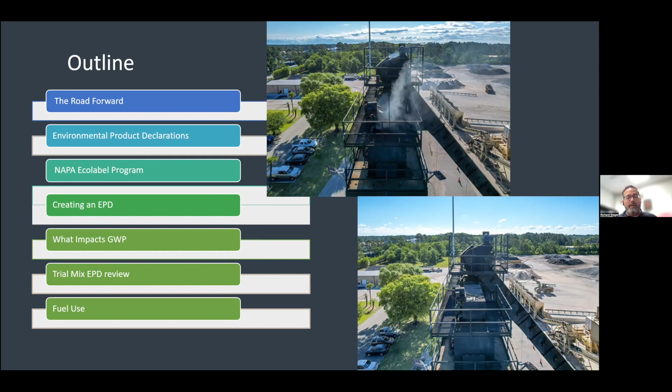Many of you have probably heard about the Road Forward from NAPA, which is NAPA's vision for net zero carbon emissions for the asphalt industry. Many agencies and governmental bodies are considering greenhouse gas emissions in their project funding and procurement decisions, and so the asphalt industry is leading the way in this area. NAPA has developed a set of long-term goals and tactics for achieving net zero emissions by 2050. This plan was put together by a 21-member task force who met throughout 2021.

This is the genesis, or this presentation today is really kind of what got us into looking at the fuel use. One of the benefits of running warm mix is obviously dropping the temperatures and using less fuel. Most of that shows up in an EPD. This is the framework that is used to quantify greenhouse gas emissions, and EPDs are part of that.

And the Emerald Eco Label tool is a part of this framework. You'll notice that the EPDs that we're talking about today are considered cradle to gate, which means that they include the materials, the transport, and the production. This production phase is where the benefits of warm mix come into play.

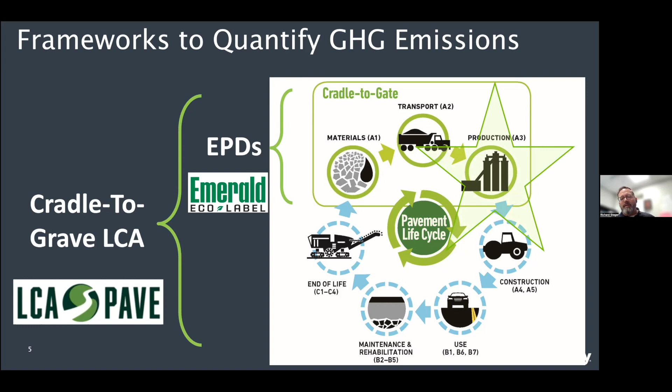So to understand what carbon emissions are, it's helpful to understand what kind of carbon we're talking about. This graphic gives you an idea of which CO2 emissions we're discussing here today. Essentially, we're looking at embodied carbons. Let me get my pointer up here.

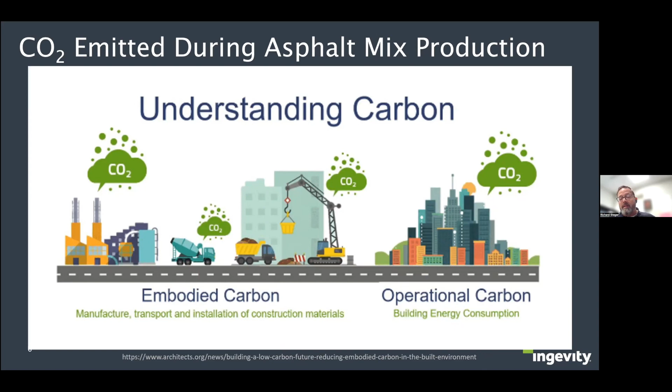This is the type of carbon we're talking about as embodied. It comes from the manufacture, transport, and installation of materials like asphalt mix. It differs from operational carbon, which is typically generated from buildings and living in the built environment. You may wonder, what is the built environment?

Well, this gives you an illustration of what the built environment is. The built environment produces about 40% of the greenhouse gas emissions. This kind of gives you an idea of how these emissions are divided.

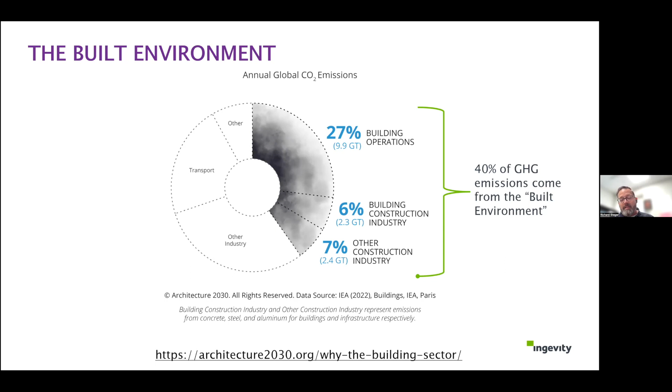When you look at an EPD, and if you're not aware, this is what an EPD is, Environmental Product Declaration. It's essentially a nutrition label for various products. The NAPA Eco Label tool generates EPDs for asphalt mixtures, and the EPD document is an 11-page report that's generated by this program.

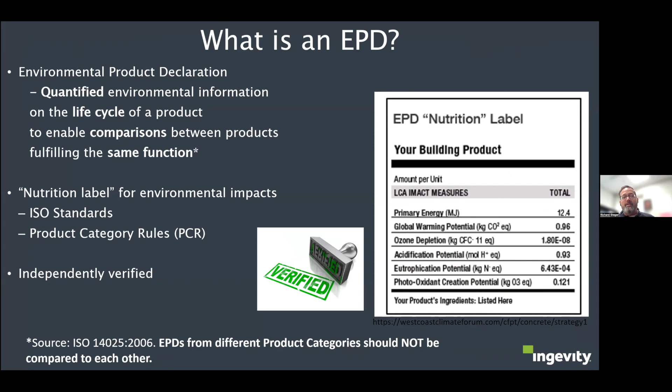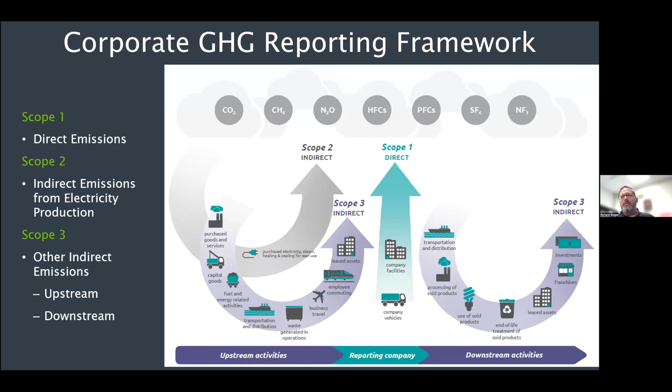So EPDs are part of the corporate greenhouse gas reporting framework, and as you'll see here, they're part of the scope 3, or indirect, type of emissions. There are indirect emissions that are upstream and also downstream of what is considered scope 1 direct emissions.

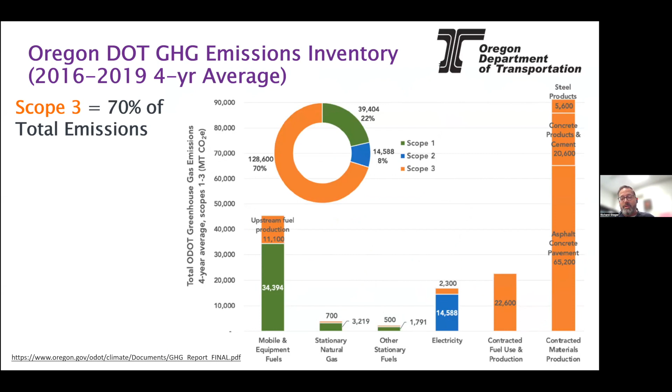To give you an idea of how asphalt mix and mix production impacts scope 3 emissions, this illustration will help. The Oregon Department of Transportation generated their greenhouse gas emissions inventory for 2016 to 2019 and reported that 70% of all the emissions were scope 3.

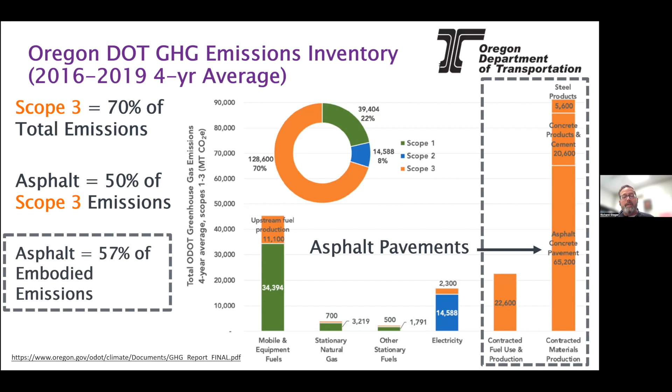Of the scope 3 emissions, 50% can be attributed to the asphalt. This works out to about 57% of the embodied carbon emissions being related to asphalt and asphalt mix production. Using warm mix can help in reducing your emissions. But the question is by how much?

All this means is that our industry needs leaders like Duval Asphalt, who are willing to produce mixtures and decrease their greenhouse gas emissions through the use of warm mix technology and lower production temperatures.

So now we're going to talk a little bit more about EPDs. These are some of the key components of NAPA's EPD program. You'll see here, these are the general program instructions. There's an underlying life cycle assessment that was done for the program. There's product category rules, and then finally you have the EPD software.

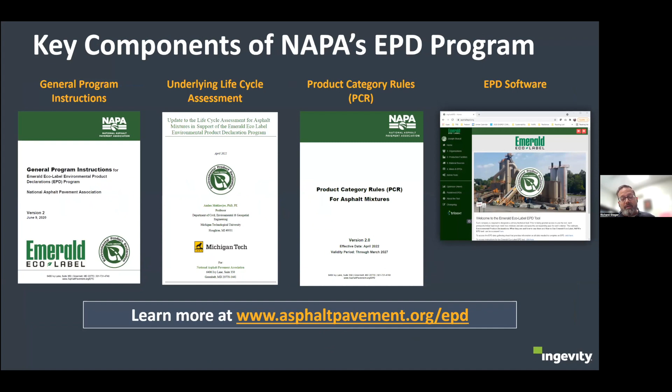You can access all of this by going to asphaltpavement.org/epd. I'm sorry, well actually, that's where this program is, asphaltepd.org.

So a little bit more about the Eco Label program. One of the things to keep in mind is that it generates EPDs that are plant specific and mix specific. That's a little different than some of the other types of products out there, such as concrete, where they have industry averages. The nice thing about the Emerald Eco Label tool is that it's very specific to the plant where the material is produced, and it's very specific to the mix.

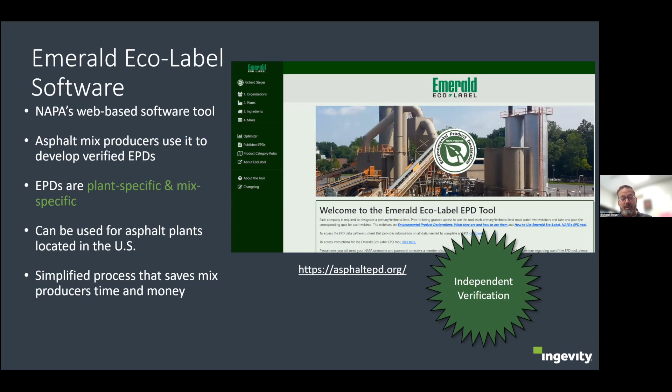So how do you use the Emerald Eco Label tool? You go to asphaltepd.org and you register. There's a couple of webinars you have to watch and then pass a couple of quizzes. Once you do that, then you can gain access to this tool.

One of the tools that was developed was this spreadsheet that NAPA has out there that helps you gather all the data that you need before you start actually inputting any of the information. You have to go through the process of purchasing access for your plants. You enter this data in for your various plants and then upload some supporting documentation.

What sort of data is required? Well, typically you're going to need 12 months worth of fuel use data, and they want that to be within the last 5 years, for whatever type of fuel you're using at your plant. It's going to include your burner, the hot oil heater, if you've got a generator of any type, and any sort of equipment at the facility, such as loaders, skid steers, those types of things.

You'll need to know about the electricity consumption, any sort of water consumption, and then finally you'll need to know about the total mixed tons that are sold. One thing that NAPA points out here is that because this data is confidential, you really can't see what is actually input. It doesn't show up on the EPD. We'll take a look at that a little bit later.

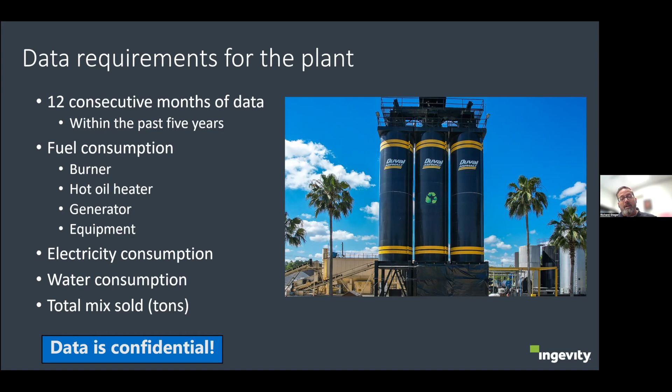For the mix design, you need to have all of the various materials identified: all the different aggregates, the asphalt binder, how much RAP or RAS you're using, or any of the additives. And then finally, you'll need to know how far you're transporting all of these materials and what type of transport—truck, rail, or barge—and the mix production temperature.

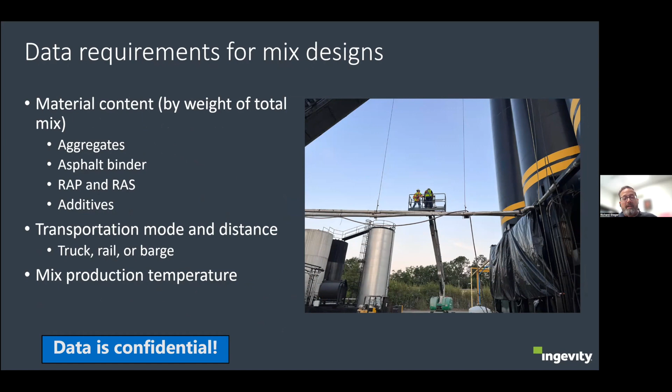To give you an idea of what an EPD does, or what the global warming potential is from a typical plant on a typical mix: say you have 95% rock, 5% asphalt binder, you're transporting these materials about 22 miles, using natural gas, and burning about 289,000 BTUs per ton of mix.

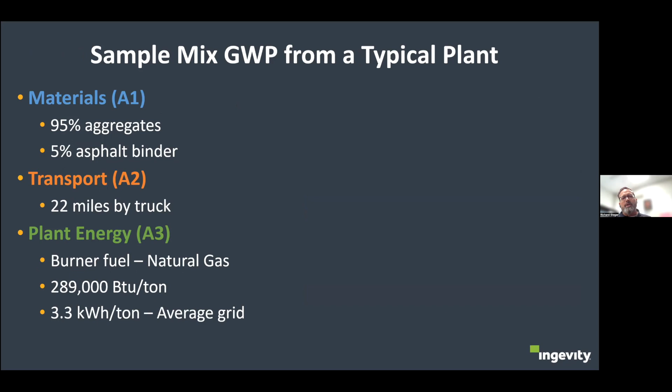And you're using about 3.3 kilowatt-hours per ton of mix on your electricity side. This is what the total global warming potential would be for the mix. You'll notice that it's divided into the A1, A2, and A3 portions for the materials, transportation, and operation. You'll see that most of this, in this particular example, comes from the material side. This can be very different depending on where you are in the country and what your particular situation is at your plant.

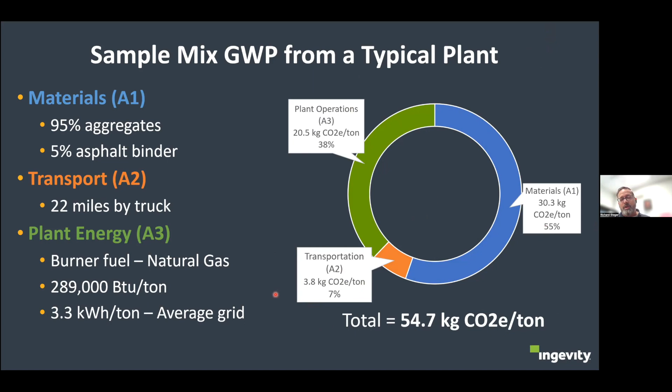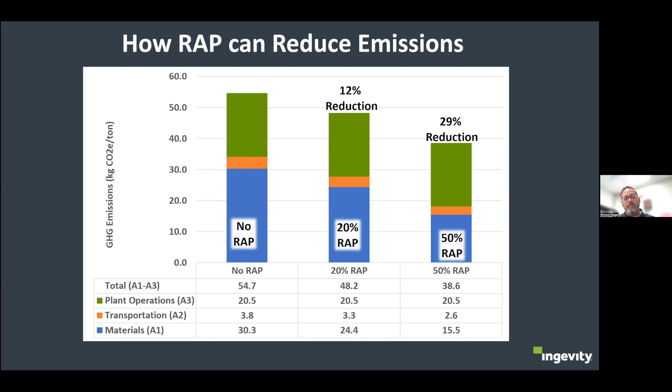One question we get a lot, and I'm sure NAPA has seen this too, is that RAP can help reduce your emissions. As you begin to increase the amount of RAP, your global warming potential numbers start to decrease. Another benefit: as you drop temperatures when using warm mix, you can also see a decrease in your global warming potential. It's a little more difficult to do that right now with the way the Ecolabel tool is set up, and we'll talk more about that in a minute.

So what are some common questions about EPDs? What are the biggest contributors to greenhouse gas emissions? As we alluded to earlier, aggregate hauling really has a lot to do with that. If you're hauling by barge and your aggregates are coming from a long distance, that can have a big impact on your global warming potential. Hauling it a long way by truck can also have an impact.

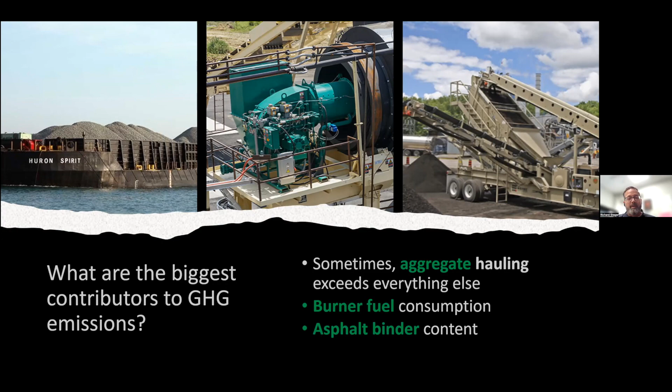The type of burner fuel you use, as well as how much you're using, can impact your global warming potential. And also how much asphalt binder you're using in the mix will definitely have an impact on what the GWP is.

Another question is: will these types of mixtures have an impact on quality and durability? One thing to keep in mind is that these specifications, and these environmental requirements, are not going to go away. But the good news is that the balanced mix design process can help in this process.

Recently NCAT published a case study using warm mix that had a bit of RAP in it as well, published recently on the NAPA website. It's called 'Improving Cracking Resistance in Alabama.' If you get this presentation after the fact, there's a link that will take you to that. If you go to the Balanced Mix Design resource page on the NAPA website, you can download a copy of this report.

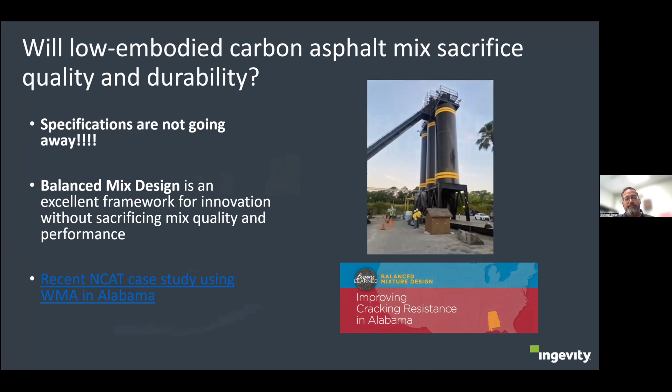So does the EPD give credit for warm mix? Not yet, that's a complicated question at this point. Part of it has to do with the way they're accounting for fuel use. Right now, the way the product categories are set up, you don't actually get that reduction unless you have 12 months worth of fuel use data that you can input into the program at those lower production temperatures. Then you can get credit for it. And right now, there's not a lot of people in the US that have that much data at lower production temperatures.

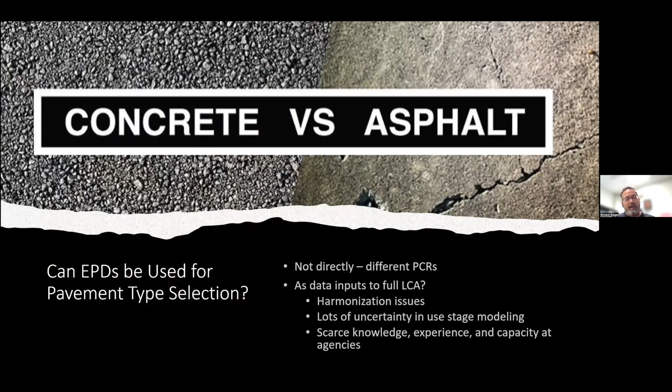So can EPDs be used for pavement type selection? The main question there is, can we compare concrete versus asphalt? Well, the short answer is no. You can't compare these two materials, and you can't compare their EPDs. The main reason is their product category rules are different, so all of the upstream data is different for concrete versus asphalt materials. There are harmonization efforts underway—you've probably heard of some of the stuff going on with the EPA—and there's a lot of effort that's going to come out over the next year or two where they're going to try to make some sort of harmonization between these types of materials, looking to have agnostic product category rules for these different materials.

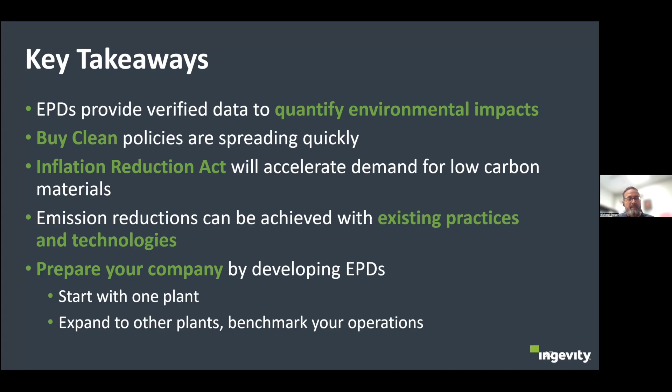So some key takeaways here: EPDs provide verified data for quantifying environmental impacts, and these buy clean policies are coming around the country very rapidly. The Inflation Reduction Act is going to increase the demand for these low carbon materials, and there's different existing practices and technologies that will help you reduce your emissions, with one of those being using warm mix technologies such as Evotherm. You can help create EPDs for your company—you can start with one plant, and then expand to EPD production for various plants. I've done these for one of the contractors in the state of Oklahoma, and essentially, once you've got all the data gathered, it takes about an hour or two to generate all of these EPDs.

So let's jump into the mix, the EPD for the mix that was used for this particular trial. You can see this is the cover sheet on this report. Molly put this together for Duval, and you can see the mix name is in here. The entity for which the material is produced is Florida DOT. The specification is an SP 9.5, a dense superpave, 9.5 millimeter, using a 52-28. One thing I'll note here is that on this particular EPD, it says it was produced between 300 and 320 degrees Fahrenheit. In actuality, when we ran this trial, we ran at 325, 275, 265, and 250. So keep that in mind as we go through this.

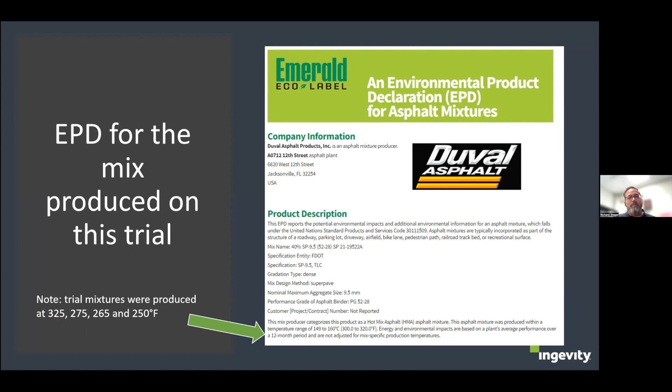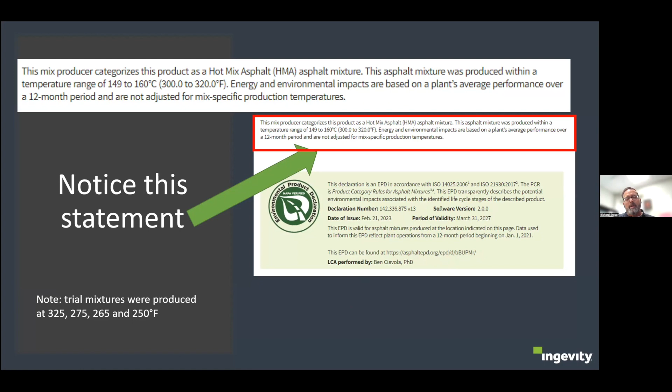This notice statement is on every one of these EPDs. It tells you the EPD declaration number, the software used to produce it, the date it was issued, those types of things. You also notice there's a URL, and this is a permanent URL for this EPD—if you go to this URL, you will find this EPD, and it will be out there in perpetuity. Again, this particular mix was not actually produced at those particular temperatures, and this is the notice that shows up on this statement.

This is the detail that the EPD gives for the different types of material. Really all you know is that it tells you it's natural stone. There was RAP used in this mix, and we'll point out here that we used percent by weight—it had almost 40% RAP in this particular mix. The binder was around 4%, and the rest of the material was natural stone.

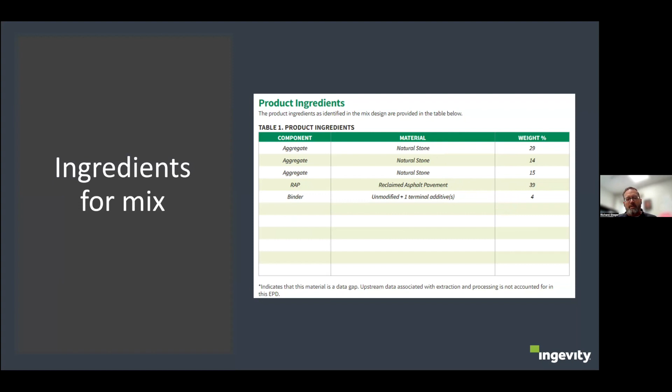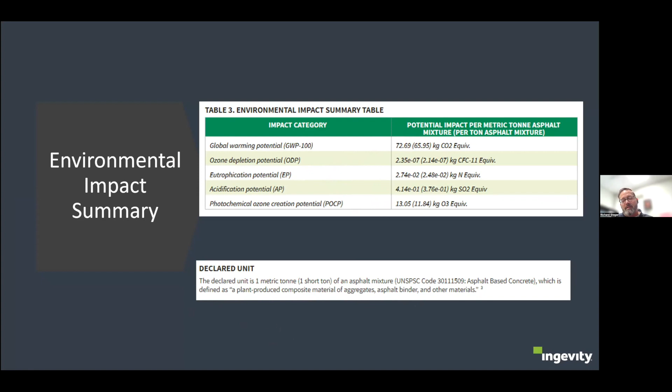This is the environmental impact summary table listed in the EPD, and it gives you the information on the global warming potential. For this particular mix, it was around 72.7 kilograms of CO2 equivalent per ton of asphalt mixture. This number is related to a metric ton; the number in parentheses is related to a short ton. It also gives you the ozone depletion potential, eutrophication, acidification, and photochemical ozone creation potential for each of these mixes. The declared unit on an EPD is 1 metric ton or 1 short ton of asphalt mixture—that's important to know as we move forward, and important to remember.

One of the things that's very useful in the Eco Label program is a tool called the optimizer. One of the things you can do in this optimizer is generate diagrams called Sankey diagrams, and you can look at different variations of what happens with a particular mix.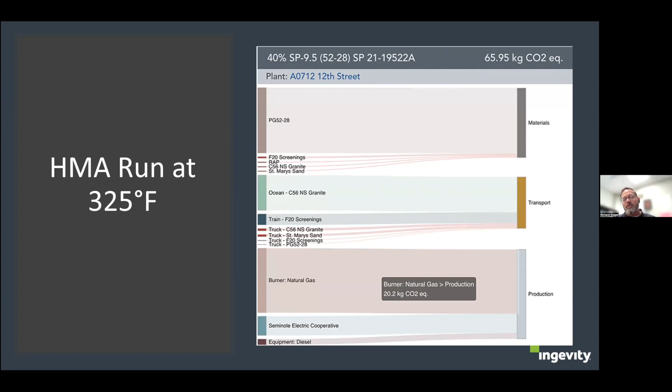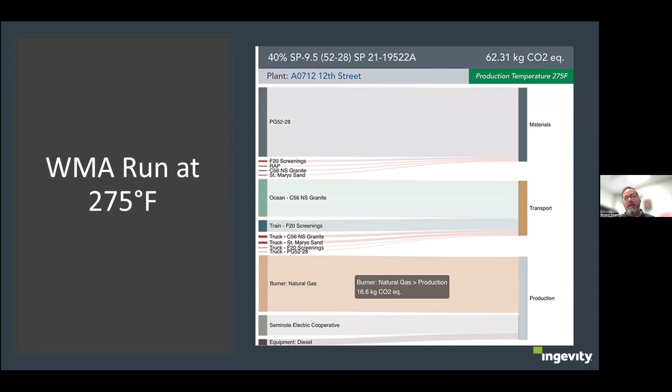As we begin to drop the temperature down to 275, we went into the program and adjusted the fuel use. Here, the burner was around 20.2 kilograms, and this is the amount of CO2 related to burning that much fuel for this mix. When you drop the temperature, you use less fuel, shown here at about 16.6 kilograms of CO2 at 275. When you drop to 265, it's around 15.9 kilograms, and at 250, it's around 14.9 kilograms.

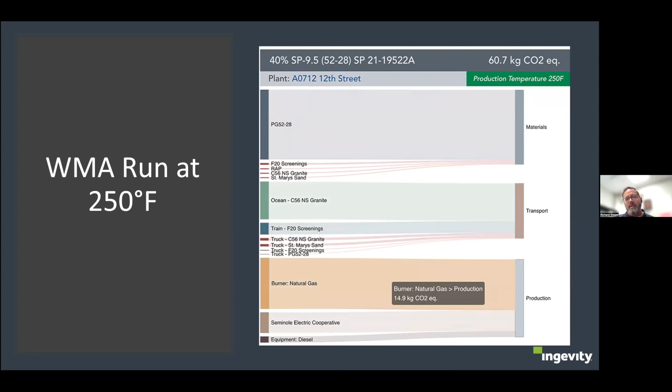To summarize, as you begin to drop the temperatures on this particular mix, the global warming potential number begins to drop. Also, you'll see that the contribution from the natural gas to the global warming potential, when you burn it, begins to drop here as well.

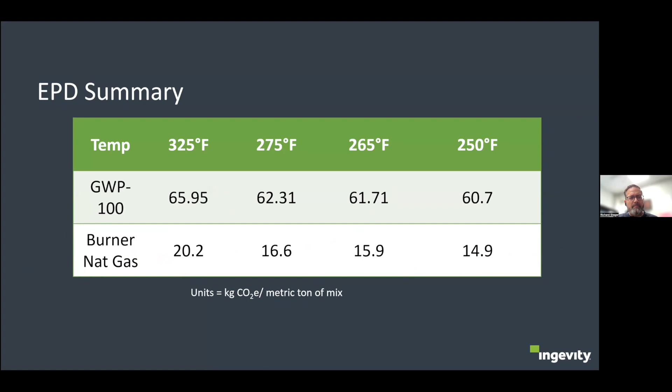My colleagues at Ingevity spent a lot of time collecting this data, and my colleague Trey Wersh put this slide together. We used a natural gas price of $9 per MMBTU for this scenario. At this plant, we were running about 200 tons per hour, with 40% RAP, and assumed they run about 150,000 tons of mix per year. If we ran it at these lower temperatures every year, they could save about $60,000 a year just by running the mix at 265 degrees Fahrenheit, or about 41 cents a ton.

So that's one way that warm mix can help reduce your costs when it comes to fuel costs essentially. This is one of the benefits from using warm mix technology, and it also helps out from an environmental standpoint.

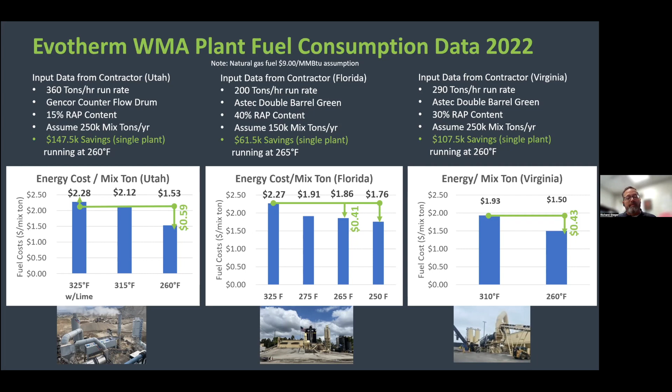This is another chart we've developed based off a lot of the work we've done here. It shows essentially that as you begin to drop the temperature, you begin to save money through the production of using less burner fuel.

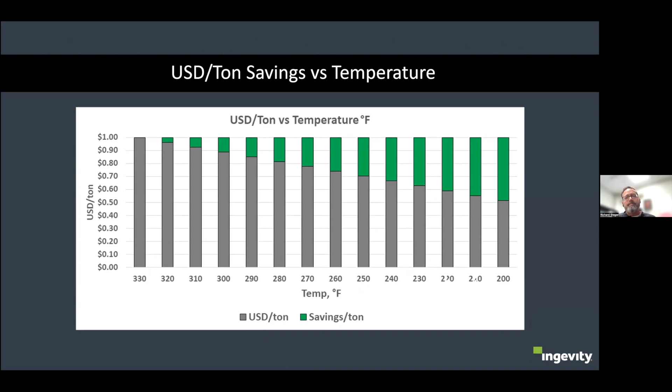Thanks. As Molly mentioned at the start, a lot of studies have been done on the effects of the binder, mix performance, and pavement design with warm mix. We kind of looked at it here at Duval Asphalt, where we use the Ingevity product Evotherm day in and day out, and we use high RAP 40% day in and day out. So let's lower these temperatures and see what we can find out, and see if this is really going to be realized, primarily in the fuel savings as well as the performance in the field of the mix.

And along the way, we gathered some pretty interesting data. Overviewing, we did initial stack testing to get a baseline of your carbon monoxide, nitrogen oxide, volatile organic compounds, and carbon dioxide. Concentration was on the CO2 because I was told it's the bulk of the pollutants, the largest piece of the pie against the COs, the NOx, and the VOCs.

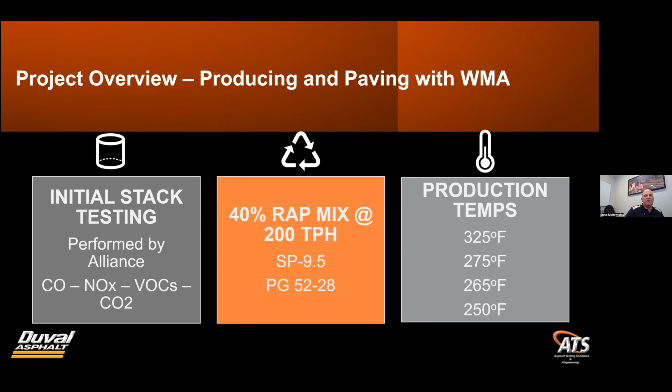We produced this mix over 3 consecutive days because we wanted to run at each temperature a minimum of 1 hour steady. It's a 40% RAP mix, 200 tons per hour, an SP-9.5, as Richard had mentioned, utilizing PG 52-28, and there again, the 4 temperatures.

The 3 main focuses, again, are the green initiatives, the visible emissions tracking at the plant and also at the paver, and the financial savings relative to temperature reduction. So if we lower these temperatures, how much are we really going to realize in savings, especially in fuel? And then also field effects, like I mentioned, impact on compaction efforts and workability.

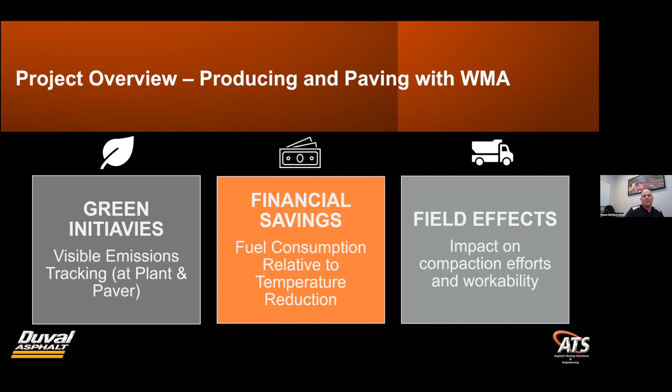Richard had mentioned some of this. According to the greenhouse gas emissions inventory for asphalt mix production in the United States, current industry practices and opportunities to reduce future emissions. One way to reduce these emissions at the plant is to implement or increase the use of warm mix technologies.

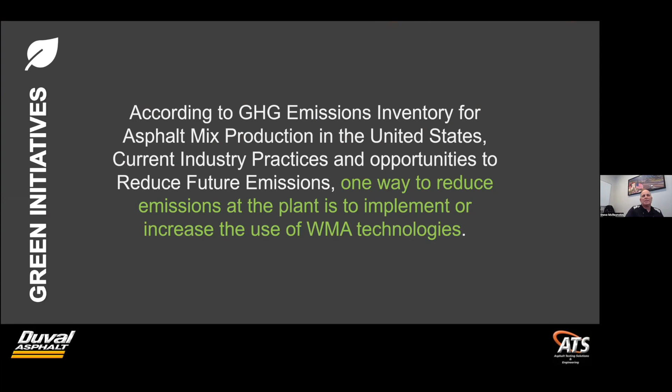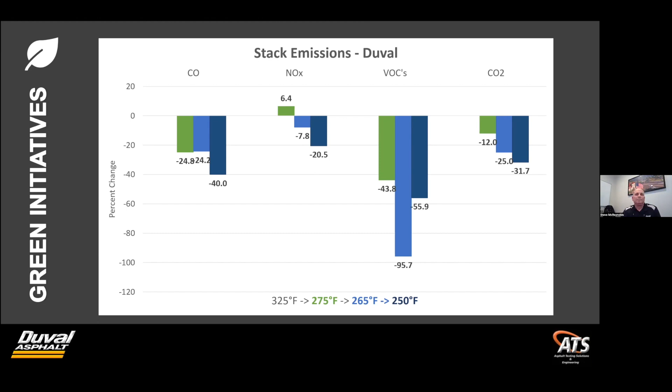Also, we looked at fine particles and very fine particles. Mostly with the fine particles are the stuff that you can see, like smoke, sand, carpet fibers, those things you can see, versus the very fine particles.

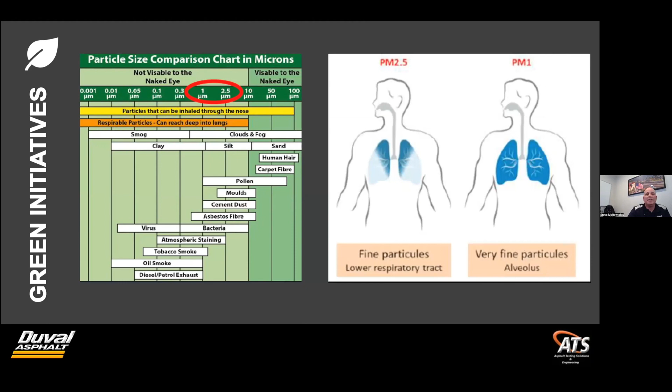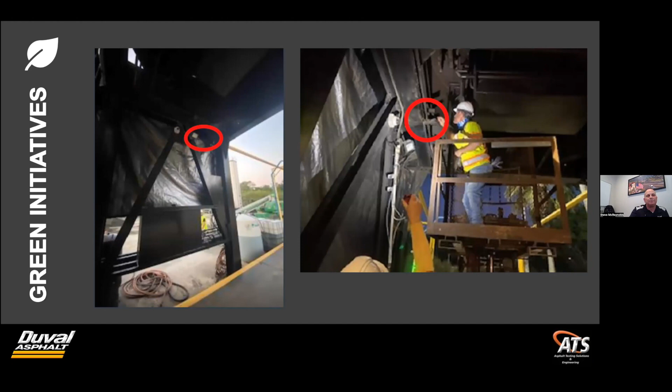So in order to do this, they put particulate emission devices. They installed them at the plant, put them underneath the silos. We utilized 2 silos, I think, for this. We did drape the silos with tarps on the outside to keep the wind away, because we were, I think, in late spring, early summer. So we do have some wind. We're relatively close to the Atlantic Ocean here, so we wanted to keep that down.

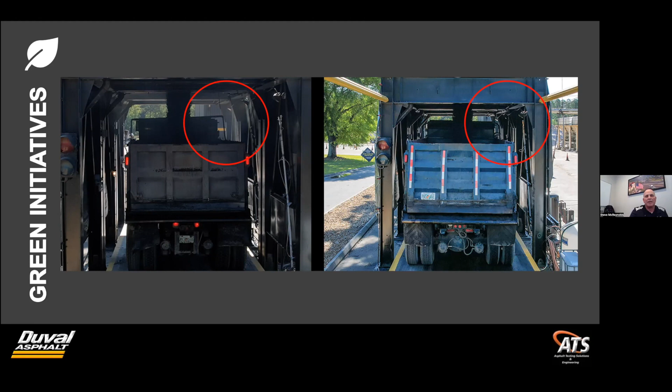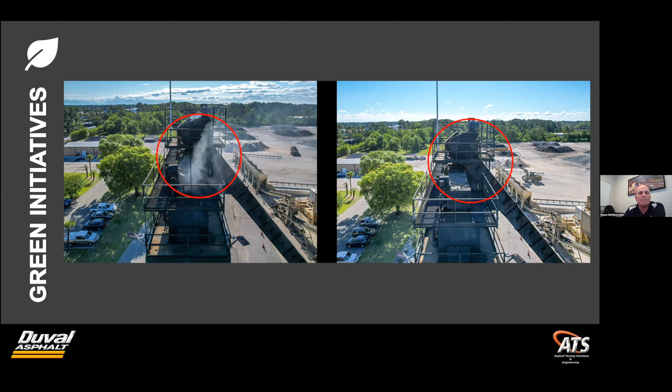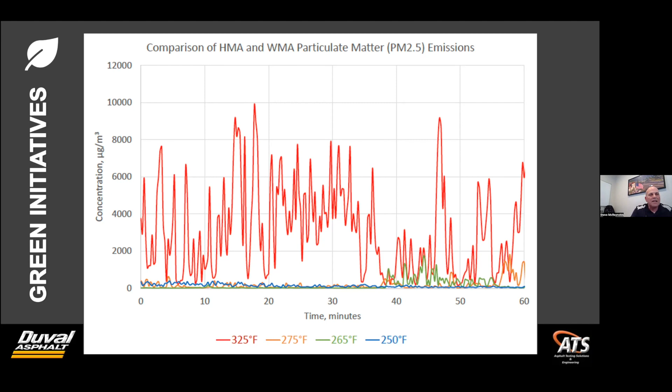Here it is kind of in a graph. These are the comparison of hot mix and warm mix particulate matter. This is, like I said, a continuous reading for an hour at each temperature from the top of the silo. So we've all seen smoke on our jobs, this kind of quantifies what we see. The red graph is your 325, so that's all the smoke you're seeing, and you can see that it's almost baseline at 275 degrees. So we really reduce that particulate matter by going to 275, and then you can see it continue at 265 and 250.

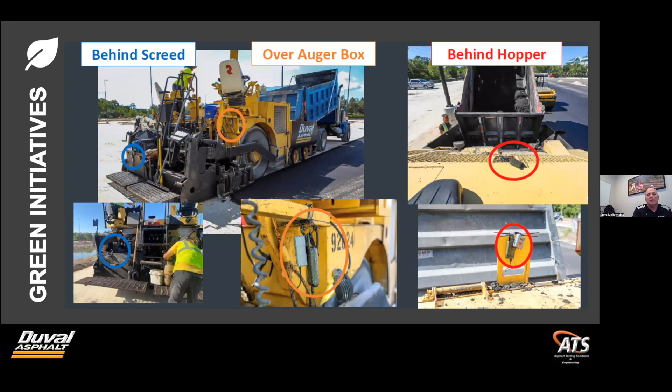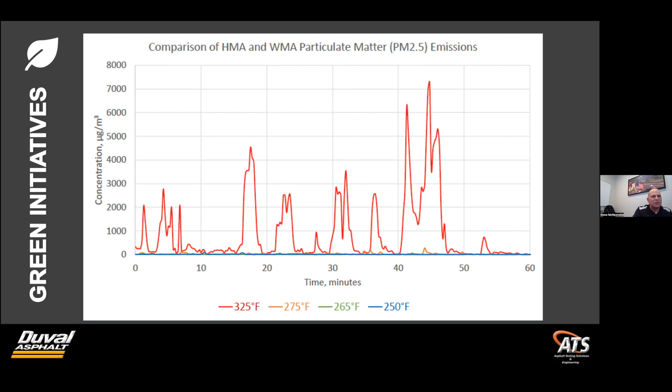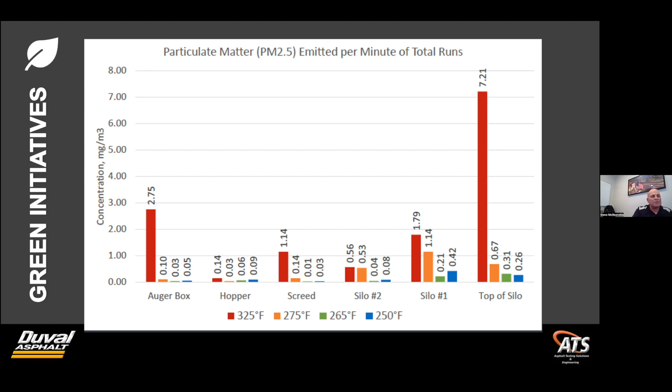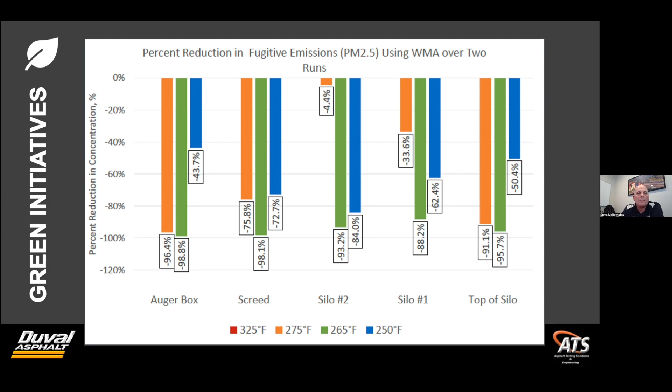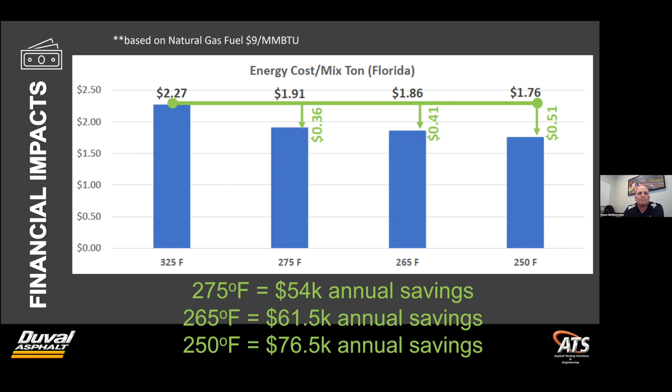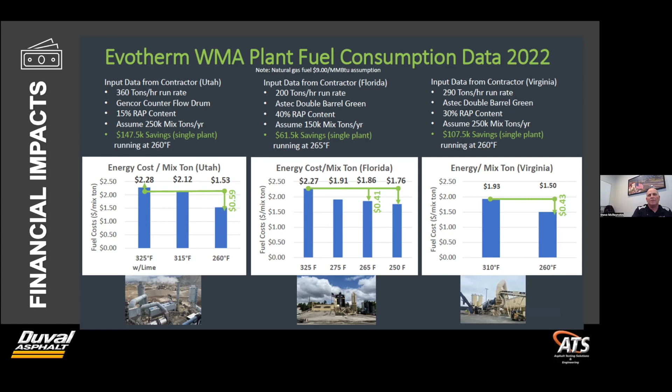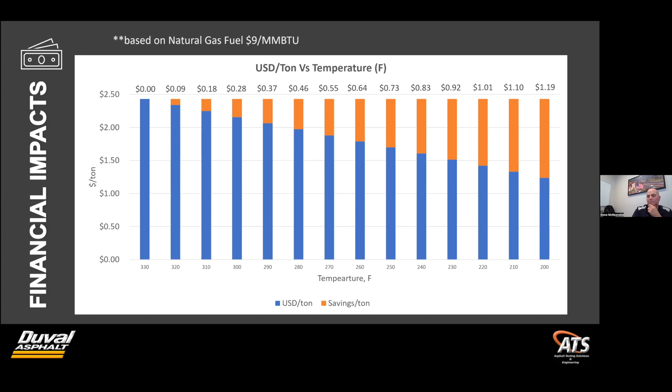So a little bit on field effects, since everybody's always worried about that. We paved a very large parking lot for a delivery service - not public sales, but a lot of delivery trucks, a very large project. There's a lot of handwork, as you're aware in a parking lot situation: drainage basins in the middle, landscape curbing coming out. We were really interested in how this would affect the crew when it comes to handwork, since that's one of the hardest parts of paving. So dropping these temperatures, would it affect the workability of the mix?

We talked to the crew and there was no effect on workability. Using the Evotherm and the lower temperatures, the mix was just as workable at 250 as it was at 325.

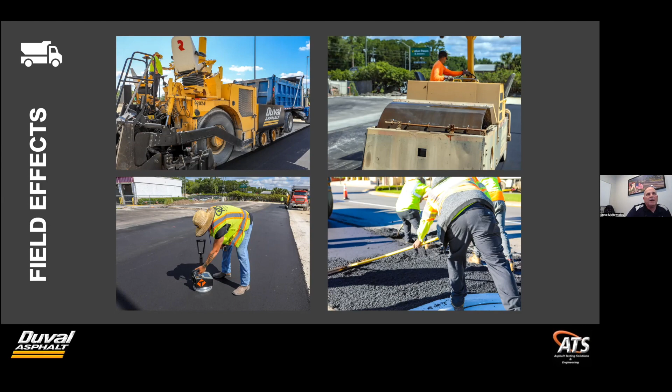Another part of the field effects is density, which we're all concerned about. We didn't cut any cores in this parking lot, but we used a pavement quality indicator, which we use day in and day out. Most of us in asphalt paving use it as a process control or quality control tool to see if we're achieving density at a particular rolling pattern. We followed PQI's directions, taking 5 readings at one spot and averaging to get a density reading. Since we didn't cut cores, these aren't correlated to cores, but if you've been involved in QC you know you're looking for consistent numbers to confirm you're achieving what you want.

At different temperatures - 325, 275, and 250 - these numbers were very comparable and consistent throughout. As a quality control guy, that speaks a lot to me: can I make it look good and sell it to my customer, while knowing I'm achieving density? And then answering to management - yeah, we had a big fuel savings. Like I said at the start, this is from using what we use every day, 40% RAP and Ingevity's Evotherm product, and now by lowering the temperature we're realizing a fuel savings.

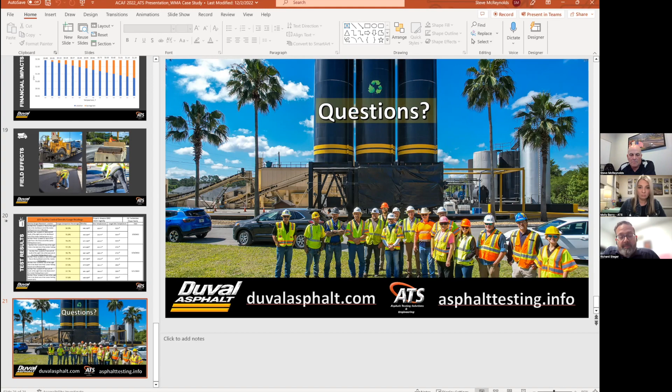Rich, I think you can speak to Ingevity. Yes, EPDs for Evotherm have been published. You can go to Ingevity.com, their public website, under sustainability, and you can see the EPDs that are out there. I think currently only Evotherm M1 and Evotherm P25 are out there. We have more that are going to be published probably within the next month or so. They're completed, we just haven't finalized them and put them up on the website yet.

What was the additive cost per ton? I'm not sure what the cost per ton is. I'm a quality control manager, I'm not the CFO, so I don't know exactly what it costs, Molly. I think it was like a dollar or so, somewhere in that range per ton.

So this presentation outlines benefits of warm mix from a couple different perspectives. We talked about the health and safety of our workers, financial impacts, and even the lack of impact on workability. So what do you say to your FOB customers who insist that the mix they purchase is piping hot, Steve?

Well, I think it's an educational thing that we have to really work closely with our FOB customers and let them know that we've researched this product, that it works. And this is the future. This is the way we're going, with fuel costs the way they are today, we need to save the cost so we can pass that on to our FOB customers, as well as their customers in return. So it's an educational process. It's just like when we switched from Marshall mix here in Florida to Superpave, it was all educational. Everybody wanted the S1 or S2, and we have Superpave now, and we got past that, and I think we'll get past that as well here, changing from hot mix to warm mix.